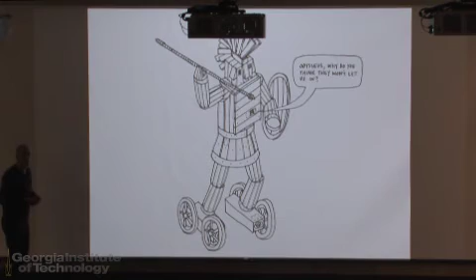Now, if I were to describe how, if you want a building to be an agent, that you are successful, I would say do not follow the standard modus operandi of our profession, which is, in my opinion, to take your a priori ambitions and roll them up to the gates of Troy — effectively rolling up a 60-foot Spartan with a spear — and wonder why... by the way, I swear a lot, because it's just about to come out of my mouth. I apologize in advance. Why the hell won't they let me in? Well, it's because you're rolling a 60-foot Spartan with a spear up to the gates of Troy. No wonder they won't let you in.

So what you must do — now this idea works if you are benevolent towards your client, it also works if you are malevolent towards your client, and I'll talk about that in just one second. But effectively, what you should do — now I personally believe that we are benevolent with our client. We like to identify what the agency is with them. So we work with our client to figure out what the hell will get us to the gates of Troy, i.e. what is the thing that will let us in? And once we get the thing in, that allows us to deliver what it is we want the thing to do. Now, you can be benevolent and deliver maidens, or you can be malevolent and deliver whatever your own agenda is. That's not really my issue. That is also between you and your therapist.

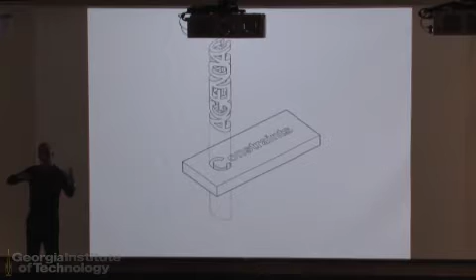Now, if I could summarize it into one single diagram, it would be this: if, in my opinion, we as a profession are very good at what we do, we should work with our client to figure out what we want the thing to do — its agency. We should understand the project's constraints, and they can be anything — political, social, economic, schedule related. It doesn't matter. It can be about what's at the forefront of technology, what's challenging the typology, the profession. I really don't care. Whatever those constraints are, understand that they are also malleable to a degree. And then you look, using critical naivete, which I think is the core of this, for the one iteration — or at least the one you think is the most beautiful — that will pass seamlessly through the constraints, not smack up against them so that what comes out is some bastardized version of it.

Now, the process that we go through to do that is banal. Okay, it's dumb. For us, the word dumb is not a pejorative term. If something is dumb, we feel like we're onto something. Our process is dumb.

We literally go through the same process in every project. We define what we think the core issues are. In competition, we act as a proxy client. When we have a client, we sit there and force them to discuss what is troubling them. We act sort of like an architectural therapist.

Now the next step is the most crucial step, and that is we take joint positions with them. The reason it's so important, remember, this is all prior to doing architecture. The reason we take joint positions with them in the abstraction of architecture is that when we come up to a moment of crisis, when we put something onto the table and the client says, wait, I don't like it, and you say, well, that does what we agreed it should do.

That is a moment in which you as an architect are empowered to say, hey, we get to go all the way back to the beginning, you have to pay me for additional services because I've done what you asked me to do. But it also reveals that, in fact, maybe the client doesn't actually want what they originally thought they wanted, and they've learned that along the way.

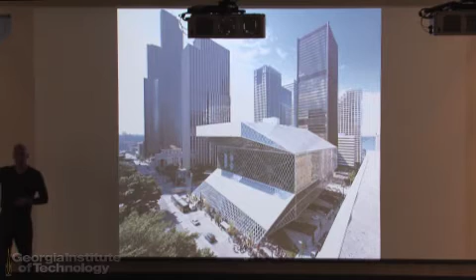The first project I'm going to start with is the Seattle Central Library, because it's the genesis of this process, largely having to do with my own experiences. When I started as partner in charge of this project, I was only 29, running an office in New York, while my mentor and senior partner was mostly in Rotterdam or flying around the world, not always present. So I couldn't walk into a room as a 29-year-old with an incredibly astute board and say, this is my vision. They would simply laugh at me and say, kid, get the hell out of here.

So the only way we realized, as an office sitting alone in New York, that we could get these people to do what we wanted was through argumentation. That's why originally I said we don't talk about beauty in public. Because if I'd said it's my vision, or I think it's beautiful, and they disagreed, we would have been screwed. So we developed this process.

So with that, I'm going to start the argumentation of the Seattle Library. In each of these projects I'll go through: what are the core issues, what were the positions, and then what was the architectural manifestation. With the Seattle Library, there were actually two really big issues, and we took two big positions, though there are a lot of other nuanced ones.

But the two big ones I want to focus on, the first had to do with the moment in time: 1999, prior to the explosion of the tech bubble. So there was incredible optimism about technology, and a lot of those prophecies have actually come true, with technology becoming ubiquitous, in your hand or your glasses and so forth. Seattle at that moment was incredibly wealthy, and there was a huge mandate for this building.

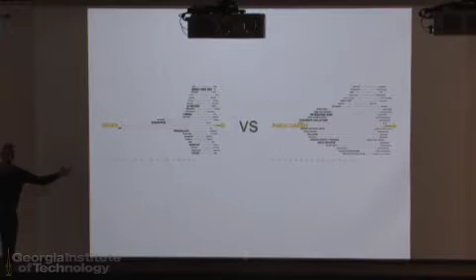So the first issue was that at that time we were seeing a simultaneous explosion of responsibilities and of information. What's interesting is that in 1999, that wasn't really apparent the way it is now. Libraries weren't readily saying that both of those things were part of their mission. They were saying, information explosion, that's our mandate. Social responsibility, yeah, it comes along for the ride, but it's not really what we're supposed to be doing.

What's interesting is that at the same time, when we visited contemporary libraries, owners and architects were relying on what I'll call universal flexibility, one space you could do anything in. But if you actually have two responsibilities, both expanding, both hungry, but you only really recognize one, that one will eat the other alive. And that's what we were seeing: buildings whose information explosion was the squeaky wheel, and whose social responsibility was getting squished out of the building.

So our architectural position, which really was the foundation of the entire formation of the building, was what we called compartmentalized flexibility. Take the things whose evolutions we could predict, at least the spectrum of which we could predict, and put them inside boxes, solving only that one thing in that box with its own tailored flexibility, its own mechanical systems, its own detailing, its own structure, its own circulation. And on the rooftops, place the things whose evolutions we couldn't predict but still wanted specific architectural character. That was the core of the idea.

We presented that to the library, and they said, you know what, we don't buy that as a position. We don't buy it because, just like everybody else at that time, they said information explosion is our responsibility, but the social responsibility explosion is not. What was interesting at that moment is that we had actually already been given their program.

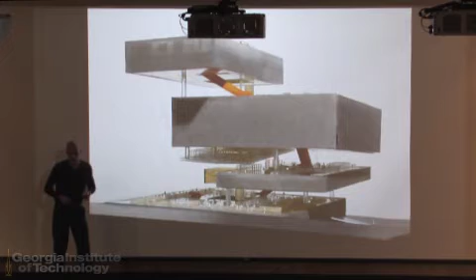Again, we went away. 3 weeks later, we came back with the design. And the design was literally that diagram, right? So there's 1, 2, 3, 4, 5 boxes, and then 1 down here, 2, 3, 4 in between spaces. We presented it to them. It was a very robust concept, but yet we didn't really know what the architecture would be inside of any of those boxes. And then something which Mark touched on, which I won't go into, we skinned it with a hybrid of a lateral system combining the facade system, and that was the result.

Now, when we first pulled the thing out of the box, the library board again said, go away. We went away. 3 weeks later, they said, come back. We came back, and they said, I don't know what that is. And you could see they were so pained. And he said, but it's everything that we agreed to do. So if you can do it for the budget, do it. And you could see they were so upset.

And then when we pulled it out of the box to the public, the same thing happened. The public went, this isn't what we need. We're spending $111.9 million for libraries. We don't need the architect's ego, we need a library. Now, we didn't defend it. The library staff defended it. The library board defended it. The city librarian defended it. The director of the central library defended it. And they said exactly the same thing: I don't know what that is, but it's absolutely every single decision we agreed to take together, and every time they changed it, it didn't work. So we told them to build it.

And that's a really hard thing for someone who's trying to create a critical op-ed piece to make any kind of story when a 65-year-old librarian says something like that. Conversation was over. All right, so there's the building.

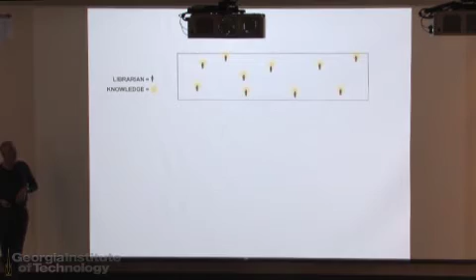And so we said we need to change the paradigm of the building. First, combine this idea of compartmentalized flexibility, but combine it with how to combat the situation where librarians are spread out through the building in fiefdoms. We want to figure out a way to put them in a collective so they can dogpile you.

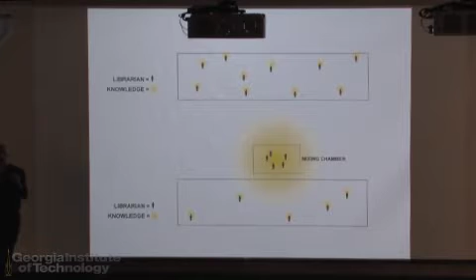So when you want to do research on Descartes, you can actually have someone who knows social philosophy, pure philosophy, and mathematics, all discussing with you to find out what it is you really want to study, whether it really is this avenue, or maybe that avenue, or maybe they turn you onto something totally different, and you start doing research on Hegel. But that's their purpose.

In order to do that, we had to overcome the other trail of tears I'll talk about tonight, which is the infernal situation when you walk into most libraries where you type in what you're looking for, you get a Dewey Decimal number, you relate it to some category like humanities, literature, and fiction. To this day, I do not know what the difference is between humanities, literature, and fiction. Dostoevsky, it's fiction, it's clearly literature, it's definitely humanities.

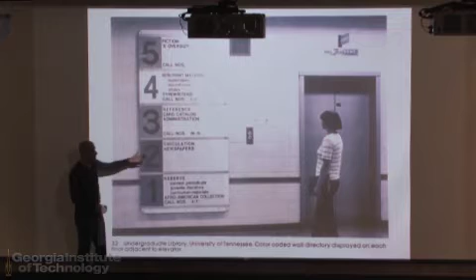Why isn't it in all of them, or one of them? I don't understand. So you take it from the Dewey Decimal number, put it into some classification that means nothing to you, then look onto a board at the floor it has to go to, get into an elevator, push the button, come out, and do the same thing in reverse. That's why librarians are used as docents. If instead we could create a system so clear to navigate by the patron that you don't need librarians for it, now the librarians can be pulled out of the books.

And so we created the book spiral. Simple idea: you go 000 to 999, running the Dewey Decimal System linearly. As anything within the Dewey Decimal System explodes or contracts, it just does it organically, and the thing grows. As long as you allow that system to double, and in our case that was the charge, allow the building to go from 750,000 books to 1.5 million books, it will always be in order, simply by reshelving as people check out books and reshelve.

In Seattle, though, that would have taken about 5 linear blocks, and so we wrapped it up into a 5-story spiral.

Also known, after the project manager said, oh you can't do that, that's going to be incredibly expensive—it's also known as a parking garage. That project manager had just finished one right down the street for a very low budget, and we said, dude, critical naivete.

Books don't explode, and believe it or not they don't really burn like cars do. So if you could do it down there for a low cost in a developer building, why can't we do it in this building also for a low cost? That's a core part of this idea of critical naivete.

So there's the solution. In this building, you get your call number and forget about everything else. You get into the elevator—it doesn't have floor numbers, it's got call numbers. You push the call number, you come out on the floor, call numbers on the floor, and you just walk to the call number, that's it. That allowed us to create the mixing chamber, this interdisciplinary zone in which the librarians could dogpile you.

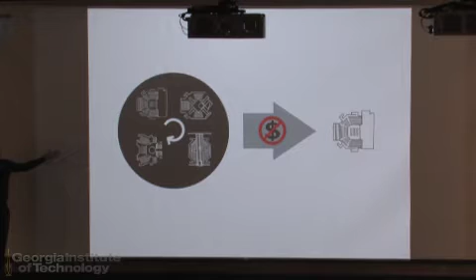So what happened is they started to run out of money, and eventually they had to fix their multi-form theater into a single configuration.

So the second position we took is let's reapportion the money. Let's not ask for more, but let's take the money from capital A architecture and put it into infrastructure such that they don't require operational budgets to go amongst various configurations. So those are the two positions.

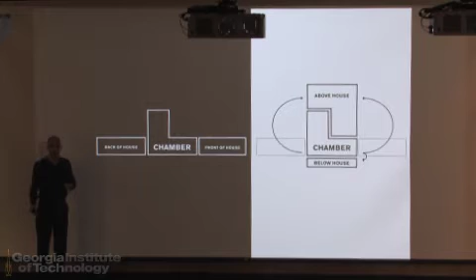The manifestation was dumb: take the front of house and make it below house, take the back of house and make it above house. Truly dumb. Makes no sense at first. The reason was it allowed us to create what we like to call affectionately superfly.

Really? I got nothing. Okay, well I guess there isn't anybody my age or older in the audience, except for Mark.

The idea of superfly is that you could take the fly tower, all the flexibilities associated with it, and smear it out over the auditorium. And then all the pristine elements you could pick up and move into the fly tower or the extended fly. That would remain an environment you could nail, drill, cut, glue, paint, and replace at minimum cost.

And then the third result was something we didn't actually anticipate at first. It wasn't one of the positions, but it became one — it simply opened up the perimeter of the chamber such that the artistic director could now control suspension of disbelief, deciding when Dallas appeared or disappeared from the audience's collective consciousness.

So there you see the building, that's it before it opened, in a thrust configuration. These are the four configurations we agreed with the client we had to do with two stagehands and a push of a button in about 15 minutes. The agreement was that these configurations had to have exceptional sight lines, exceptional acoustics, and exceptional intimacy.

This also became a theme in our work ever since — the idea of divide and conquer, which I already discussed with the library. If you provide very specific things, you actually get a lot of flexibility. What we learned is that if you give a bunch of very specific presets along a spectrum, as opposed to a black box where you could theoretically do anything but don't have the money to do anything, so you actually do nothing...

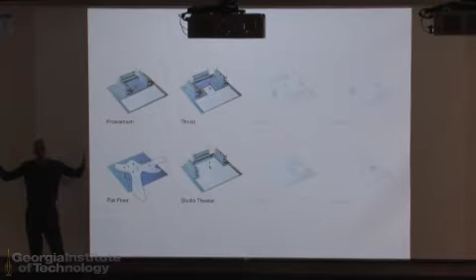If you give them these presets, and each one can be moved off center, weirdly, if you kind of squint, you start to realize you have an enormous amount of flexibility. So we wanted to be able to do all of those, but we also tested how easy it was to push all of these off center to create some of the other configurations.

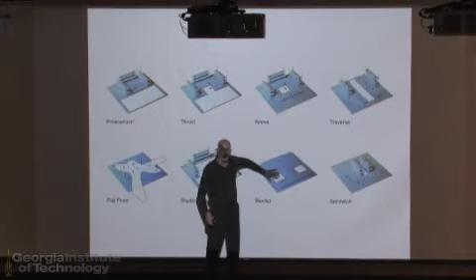So we also added arena and traverse. Now these weren't things we talked to the client about — we only talked about those others. But we did arena, traverse, and then we made up bipolar and sandwich. That one was mine, just to see how flexible this thing is — in virtue of giving them presets, does it actually increase the flexibility?

There you see it again before it was open, but someone was just giving a lecture in the building in thrust configuration. This was Henry IV, the very first show. This was something the theater consultant and we designed together — basically to see how crazy we could make the auditorium. We succeeded, and it was totally infernal — no one knew where everything was coming from.

And then there was the flat floor configuration. This one was an interesting debate between us and the client. It cost an extra $500,000 — not an extra as in we asked them to increase the budget, but an extra from the architectural side to do. And what was strange is that we, the architects, were arguing to do this.

And they really resisted us — why do you need to do flat floor? It's not a theater configuration we think is going to be used very often. Ironically, they do now use it a lot. But that wasn't why we were arguing for it. We were arguing for it because while they were building this building, they were also building, right across the street, the Winspear Opera House. The Winspear Opera House is 2,300 seats.

The Dallas Theater Center survives, historically, by getting road shows from Broadway. Well, where do you think those road shows are going to go once they build a 2,300-seat opera house right next door? They're all going to go to the opera house. So weirdly, this institution, the AT&T Performing Arts Center, was building one institution that was cannibalizing the revenue source of the other, which was the one that already had a revenue stream.

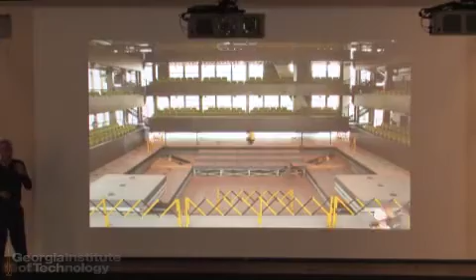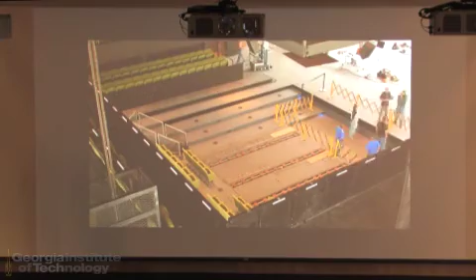I'll go back to what I said previously: the unique moment in this project was when we, the architects, started to argue for reapportioning the budgets for infrastructure. I think it was only because it was coming from us that, in fact—Mark will attest—there was a moment where we did a Hail Mary and the client didn't know it. We said we can still do capital A architecture with that budget. What we did is we held basically cheap aluminum siding in the budget for the exterior, knowing damn well we had no idea how to do something extraordinary with that budget, but we had confidence we would be able to do so. I think it probably wouldn't have happened if it hadn't been for Mark.

Okay, I'm going to go on. Then the other repercussions—something not originally planned for, but maybe became the most important and defining thing about the building—this notion that the entire perimeter can open up.

So there you see the enclosure. That enclosure is an STC 57 glass wall—basically a box-in-a-box construction. What you're seeing inboard is not a theater curtain, it's actually a trompe-l'oeil: vinyl curtains integrated just on the inboard of that acoustic wall. That enclosure can therefore be totally blackened out. You can do totally hermetic normal theater, but you can also open the entire perimeter up.

So now, at the last act of Macbeth, as the artistic director, if he or she wants you to associate the parable you're seeing on stage—or to be or not to be—right at that moment, suddenly you see daylight, or darkness, or cars driving by. Interestingly enough, you don't hear the cars driving by. So it allows you to still have the hermetic environment, but to let reality in—it's no longer the hand of the architect that determines the suspension of disbelief.

What's interesting about this idea is that it also started to build patronage. People would come—Dallas doesn't have a great climate, so the hit months where it happens aren't very great—but families will come and sit on the grass outside, watch them block out sets and rehearse, building up their patronage. Now their patronage has increased threefold.

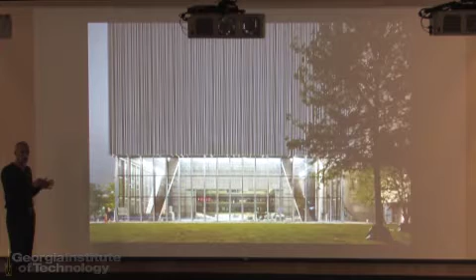Another statistic, talking about flexibility: of the 25 shows or productions they've run in the building since 2009, they've done it in 20 different configurations. There are 4 presets, meaning they've done 16 shows in something that doesn't look anything like the presets we gave them. And another factoid that proves the concept—over the first 50 years of their existence, they sent 12 different productions out of house, but all to small regional theaters. In the last 5 years, they've sent 7 to Broadway or off-Broadway.

To take this idea of the perimeter opening a step further, we then also made the perimeter open. So when they do a Streetcar Named Desire, they can literally drive a motorcycle directly in, and have the audience come directly out of the building.

So in the end, this is what we gave them, a kind of palette. They have multi-form, but they also have multi-procession. You can call it episodic, processional, focal, and open, but effectively it is Renaissance, Wagnerian, Greek, and contemporary.

So the ideal is: okay, they can use our auditorium, and in our auditorium you go down into the building, into a lobby with little dangly lights—you might like them, you might not. You go up our stair, up into your seat. But the artistic director can literally say, I want someone to come in a Wagnerian sequence directly into the chamber.

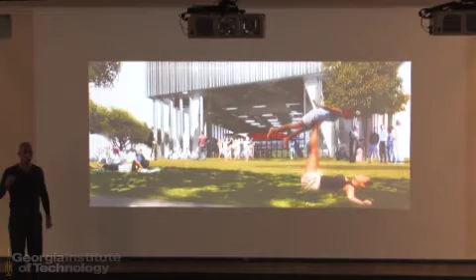So now they could do this: you could enter Wagnerian, first act in thrust, intermission in Greek, second act in arena, and everyone leaves through our lobby with dangly bits. That, I would call, is architecture doing something—our hand as architects empowering the user, without, I hope, creating something you'd claim is shitty architecture.

Now, how we get to this—I'd say our process is Darwinian. It's this kind of incredibly logical process. But at every moment in this decision tree there are moments where two or three or four different ideas all work, and this happens four times a day. At every one of those moments, there's a subjective aesthetic decision being made.

So it is not form following function. It is a totally blended process. But it is still highly Darwinian, highly argument-based. And there you see the conclusion.

Now the next project I'm going to show—first I have to, it's actually two projects. I have to start with a sad story and end with a happy story. The issue and position and manifestation of this entire thing is just about speed.

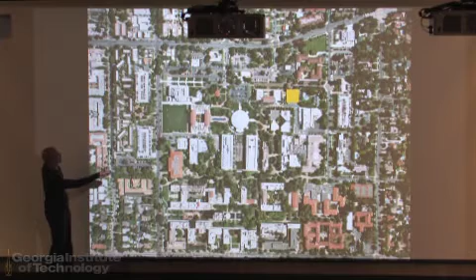It starts with a project we started in 2006, an interdisciplinary building for Caltech. Caltech is this square, like this. It's beautiful—takes 15 minutes to walk from there to there. It's always 72 degrees. They are the richest institution in the United States by a magnitude of 10—the next closest institution gets one-tenth the funding per student, federal funding per student, and that's Stanford. So they're rich, they're warm, they're in beauty, there are no problems.

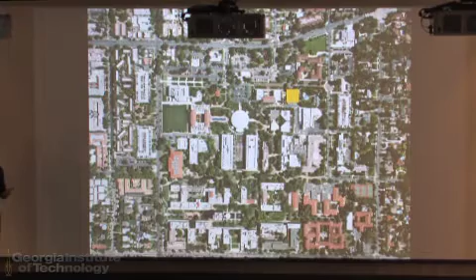We didn't know what to do. There was no hook. In fact, the only thing we came up with originally, honest to God, was: it's a center, but it's not in the center of the campus. That was it. That's all we could dig up.

Eventually, we created this. It was an interdisciplinary building where they'd take people who had won the Nobel Prize in applied and computational mathematics, chemistry, particle physics, and so forth, and just dump them all into one building and say, have at it—let's see what happens.

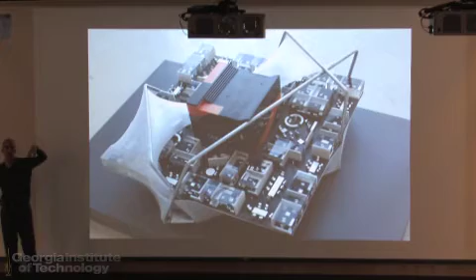So the concept was a big flat plate on which all these Nobel Prize winners would sit with their entourages of postdocs, doctoral students, graduate students, and undergraduates, and they would grab or give up space on that plate based on a set of rules. We designed that plate to facilitate that, then took all the recitation and debate areas and made this tower in the center. We wrapped it in a kind of cocoon, so it looked like a big caterpillar thingy. You can see the weirdness of the spaces.

We got all the way through concept design. The university loved it, they approved it. We were supposed to start schematic design and said—wait, it has to be approved by the Pasadena Design Commission. You didn't think that was something we might have needed to know at the beginning of the process?

This, of course, is an interesting moment in contracts where you're not really sure who's on the hook for this. You did your job, it was approved, you met the positions you all took, now you're going to go before the design commission. You don't really know what's going to happen, and we should have known based on what we saw here. The design commission looked at it for a second and said, no, it's got to be Spanish style.

So I think I'm really smart. I go to the president of Caltech, who is also a Nobel Prize winner, and I say to him, this would be kind of cool. I don't know anything about Spanish style, but a lot of people in Pasadena do. Why don't you hire someone to do a Spanish style box, and we'll put it around a really crazy kind of ugly wild thing, and it will do exactly what you wanted, which is to have this really gregarious thing, but it'll be even more gregarious and weird because it's in a Spanish style box.

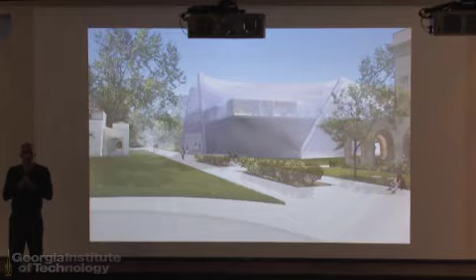Now the president of Caltech looked at me and said, you know, Josh, you've been telling me for about 5 months now that constraints are the mother of opportunity. Isn't this just another constraint? I.e., don't try to outsmart really smart people. You totally called my bluff.

So now I'm in a total panic, because I really don't know what to do. We're going to have to redesign. It's too early in the process to ask them to pay us, because that will piss them off and we'll lose the project. So we're starting to redesign at our own cost, and fundamentally from square one, because we're trying to think, how on earth are we going to do Spanish style?

And we thought about this for about 3 weeks. Everything in our world is in 3 weeks. And then we realized we were doing the wrong thing. We were focused on the wrong issue. The issue was not the design.

Now, what does Neo say to the kid? He says, how do you bend the spoon? And what does the kid say back? There is no spoon. Thank you. You know how many times in universities I've given this image and no one knows the answer? I even did it at SCI-Arc, like next to Hollywood. No idea what I was talking about.

There is no spoon, right? The problem was not the design. The problem was the design commission. We had to redesign the design commission. So we asked the head of communications of the university to put us on the docket on the first day that the design commission was going to review 85, basically, garage additions. Now, you have to understand that Pasadena is full of mid-century modernist buildings, and all of those beautiful mid-century modernist buildings, for some reason, now need to have Spanish-style garage additions.

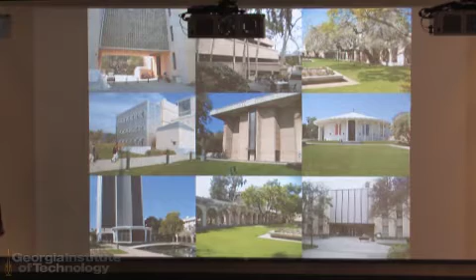So we go in with 2 slides. And the first slide was this one. And we said to the Design Commission, over the last 82 years on which you have been legislating what can happen on the campus, you have indeed done Spanish style and Spanish style. You've also done modernist and brutalist and neo-modernist, and you've done bad. And the only thing, if you squint, that you seem to have legislated over 82 years is the color beige. And our building is beige, so you better let us do it.

Now, you would think there would have been total silence, but there wasn't. There was a huge shitstorm that erupted, not from the design commission, but from the people behind us who were waiting to do their garage additions. They went, yeah, you're right, why do I have to do a Spanish-style garage? So we then just took our 2 slides and walked off the stage.

3 weeks later, we got - I already gave the punchline away - we got a letter from the Design Commission. The Design Commission basically said, go away, as long as you do a building that is 3 stories, austere, with a ground floor arcade, do not come back. Okay? And so we took the old idea and we did what we call the wolf in sheep's clothing building. We just inverted it, like a sea slug that walks up to something and wants to eat it and just literally inverts itself to eat the thing. We just did that to the building.

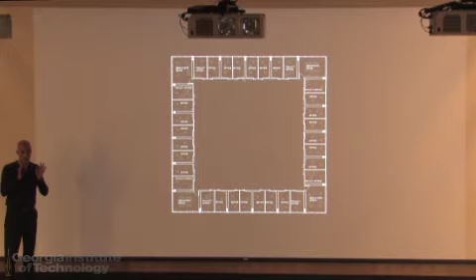We took the thing that used to be really austere and kind of rectilinear and uptight in the center, and we put it around the perimeter. And that's where we put all of the Nobel candidates into little entourages. We basically built the world's most hyper motel. It was a post-tension concrete slab building built up on little pilotis. It had no detailing. It was concrete floor, concrete ceiling, so low that we didn't have to have breaks in the stairs.

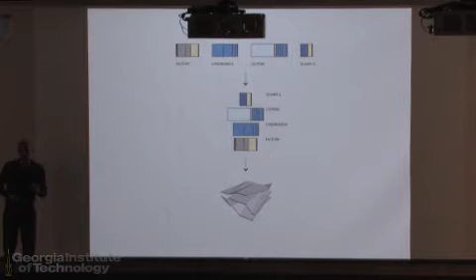And the way we did that is we didn't have mechanical systems. We just put fan coil units in the wall, just like a cheap motel. And that cheap motel would blow over in a wind. So into the center, we had to put a more gregarious structure, a steel structure, and that steel structure had all the recitation areas.

So it was the gregarious thing that they wanted to be interdisciplinary and mixing in the center. And its slopes and so forth were all very carefully designed to create bent plates.

Why? Go back to your structures class. When you take something and you fold it, what do you end up doing to it? You increase its moment of inertia. When you increase its moment of inertia, you increase its stiffness.

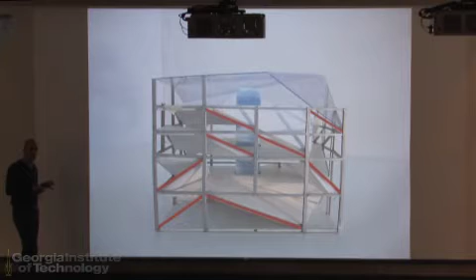So if we could come up with a system in which we had 2 diagonals per face, per floor, per face, we would create an idealized braced frame. Now that's what we presented to them. We're now 6 months in, we've been working for 3 months at our own cost. We present this, and by the way, there was still this little thing on the roof that we wanted before.

And we presented to them, they said, that's great, we really like it, but couldn't this move over here? And couldn't it move? And we said, no, it'll fall down. I said, come on, that can't be true. They said, no, it'll fall down. So they took the building over to the physics department. The physics department looked at it, and said, it'll fall down.

And so it was a moment in which we truly handcuffed the client, simply because we didn't want to keep redesigning at our own cost. We'd had enough. And there you see the building, a representation of the interior. They built it just as I would say - first the steel braced frame, and then they would build the post-tension concrete lightweight structure around the exterior. And it is 3 stories, austere, with a ground floor arcade, and these are by code roof appurtenances.

That was great. We were 2 weeks away from starting construction. Morphosis's astrophysics building had just started, there were 3 buildings behind us that were also in the works. And then the president suddenly stepped down with no real explanation, and a very curmudgeonly Frenchman stepped in, who wasn't really into contemporary architecture and was certainly not into continuing the legacy of his predecessor.

And we got shit-canned on the spot. Just, we got a letter that said, here, that's it. Don't ever call us again. Here's your models. Basta. Goodbye. And this was literally 2 weeks before we were supposed to start construction. We put it away. That was 2008, and that was it.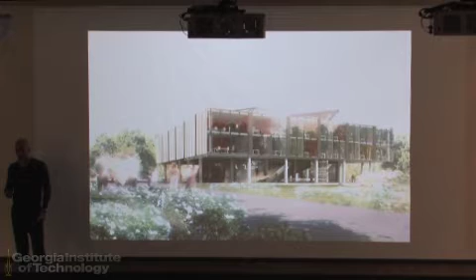That was it until 2009. 2009, this man, he's about this tall, walked into our office with Giselle Bundchen. And I looked at Giselle Bundchen. And he's talking, and I'm looking at Giselle Bundchen. And he says...

They were going to demolish this headquarters and factory with eminent domain to build a freeway off it. And because they were 50% publicly owned, they were worried that if that happened, their stock prices would crash. And this was at the worst of the market, right? It's 2009. He thought, we may go under, simply because of the negative publicity of losing our headquarters.

So what he starts to say, and I'm not really paying attention, is he says, I need someone to design and build a world-class building in 11 months. And I'm still looking at Giselle, but that caught my ear, and I thought, this guy is nuts.

He's truly nuts. And he said, no, but don't worry about it, because my cousin, who's the CFO, he just bought a structure that has been sitting fallow in the hills of Istanbul for 25 years. So we'll just use that. It'll be a lot faster and a lot quicker. And I'm thinking, this guy's on hashish. That is not going to be faster or quicker. It's going to be slower and infinitely more expensive.

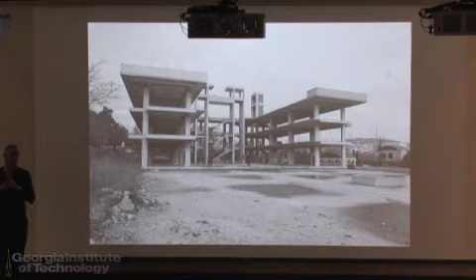So I showed him Caltech. I said, do you like it? He said yeah. I said, do you like it a lot? I said, okay, let's go to dinner and you bring Giselle and we'll talk about terms. So that was on Friday.

On Sunday, we flew to Istanbul. On Monday, we met with his structural engineer.

I will say that these things exist all over the countryside in Istanbul. Why? Because development is cheap there. Labor and materials are still cheap, land is cheap, and so speculation is cheap. People start to build things, and if it doesn't seem like it's going to pan out, they just walk away from it. So this thing was just sitting on a really prominent spot on the Asian side of the Bosphorus.

We got to Istanbul on Monday. We met with his structural engineer. That is the structure as given. And literally, because it was also meant to be a motel, it was exactly the same floor height, basically the same perimeter and shape as Caltech.

So all we had to do for that day is figure out how to take that and morph it into that structurally. On Wednesday, they started construction with construction documents of the perimeter. Okay, now we are one day in. He said 11 months.

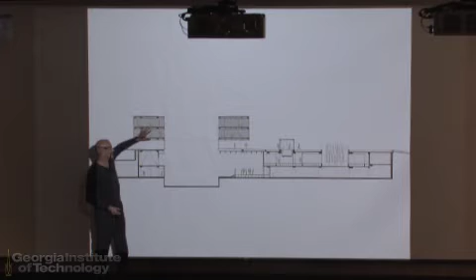But the problem was inverted. We had this thing—I'm already showing you the refinement of the structure, but effectively it was this really, really heavy concrete structure, because they don't really worry so much about the structural engineering there. They just throw tons of rebar and concrete at it. They have really bad earthquakes, so they just kind of over-design it.

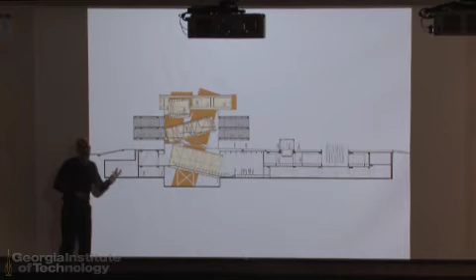They don't really care. So it's this incredibly heavy concrete building into which we had to very quickly design the other stuff, because we couldn't take Caltech's guts—we had to take the guts that would apply here. That thing had to be a lightweight steel structure because of speed, and because we didn't know how the concrete exterior would perform, we had to keep them disengaged. So it was the exact inverse problem of Caltech: heavy steel structure holding up a lightweight concrete structure there, versus heavy concrete structure not engaging at all a lightweight steel structure here.

We took a page out of the Seattle Library and put all the program into boxes, but these were very special boxes—boxes that structurally could be put onto each other in any possible way and welded together and the thing would stand up. They're kind of like massive Lego.

That took us about two weeks. We needed to stay on schedule. We needed to have the steel back after two months. We were one day in when we started construction, and two weeks in by the time we had finished this and sent the mill order off to the steel mill. Then they had six weeks to make the steel.

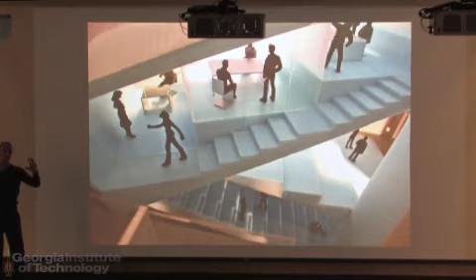In that time, we were figuring out how to take these boxes, to slope them, to put them in appropriate adjacencies to the rest of the program, sloping them so they become the primary circulation, as you see here. We went through all these iterations trying to solve the problem. After six weeks, when the steel showed up, we said, it's that one—build that one. And they did.

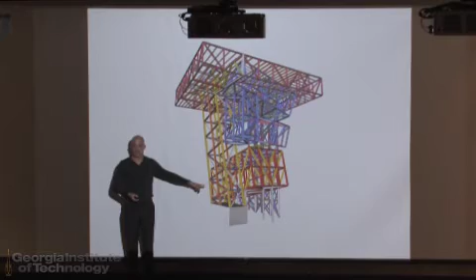To our complete shock, at one point we realized one of the boxes wasn't where it was supposed to be. We said, what are you doing? It turned out they had taken our model of this thing and were building it off the model, not off the drawings. Why? Because that thing could go any way it wanted to, and they built it—so that's the thing we designed, and they built it as I just described.

They rented the property next door, built the box in its entirety, picked it up in the air, craned it over, and dropped it into the center. So here you see the ring—now it has become a perfect square, and sort of erupting out of the belly of Kane is the alien. It's another great Hollywood reference.

And there you see the 5th box being craned in. That's the 6th box, that's the 7th box, and that's the 8th box.

They did the entire steel erection in 1.5 weeks. So we are now 2 months, 1.5 weeks into the project. Full disclosure, we missed it by 2 months. It ended up being 13 months, not 11 months. But this is the result.

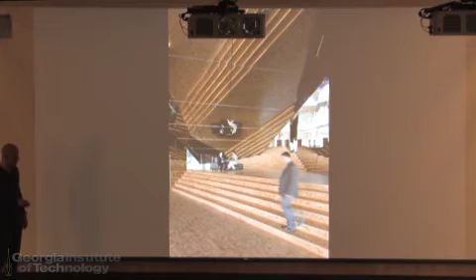This is the basement area. There used to be a parking garage. That's the library. This was a museum dedicated to his father, showing all the various designs they had done. The auditorium went from the basement up to level 1. We used the rooftop of the auditorium to go from level 1 up to level 2. The next box is the buyer's area.

They create clothes, but they also create really remarkable textiles. So people will come and order textiles, and this is the buying area for the textiles. They go up to level 2, then use the meeting box, with all the meeting rooms, to get up to level 3. Level 3 is the headquarters, and there you see Cem after 13 months.

As I said, the entire issue was how do we do this in 11 months, which we failed to do. The entire position was: do everything in 11 months, that was it. One of the interesting things for us is that after being obsessed about resolving every option and making sure we're doing the right thing, here we didn't have time to do that. We had to move quickly. We also realized that gave us a lot of leverage on the client.

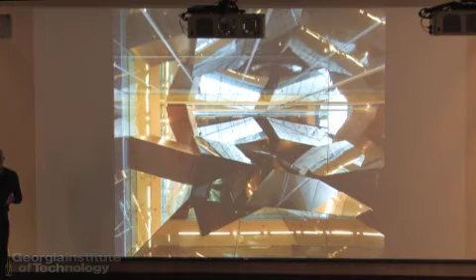At one point we said to Jem, we want to wrap the entire thing in one-way mirror glass. These are actually totally unadulterated photographs of what we call the show box. Jem, of course, was like... and we said, Jem. So Jem built it, also in a kind of pained way.

We wanted to do it, to be honest, and we never told them this, but since it was a kind of chauvinistic, voyeuristic enterprise of fashion, we thought, okay, if we're going to do it, let's do it in spades, and have Giselle Bundchen replicated 1,000 times across the building through all the mirrors. So you could say that's what we designed.

Then there was the issue of the thing around it, the thing that we were given. Now, we knew we couldn't do anything sexy with it. I hope the right image comes up. No, actually, I know it's going to come up in a second.

Jem kept saying, I want to put the name of my company, Vakko, on the building. And I'm like, it's not really us, Jem, don't really do that. And he really wanted... no, that's not the image I thought it was going to be. He kept talking about Louis Vuitton, kept talking about Coach.

I said, Jem, instead you have this really, really robust building that you can't make go away, and you want to emphasize sustainability. You're the first company in Turkey that is focused on sustainability. It would be more sustainable, or more beneficial as a sign of sustainability, to reveal that you're doing an adaptive reuse building, rather than try to hide it.

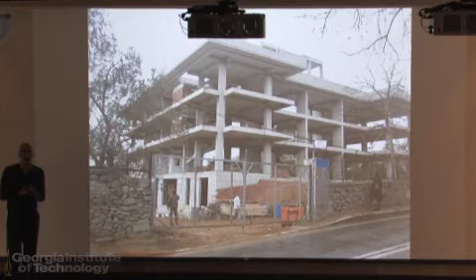Because first of all, we're never going to do it. They're always going to think, if we hid it, that we're going to look bad, and they'll think you commissioned a shitty building. So if we could reveal the guts, you can use it as part of the branding of the building. To do that, we had to create what we like to call saran wrap: you make the glass so thin that it reveals the contents, reveals the thing that we're building all this around.

Now, it goes back to structures again. If you have plate glass, it's going to be quite thick. If you put mullions around it, the glass gets thinner. But if you can slump the ideal structural shape into the glass, i.e. increase its moment, increase its stiffness, that can make the glass super thin.

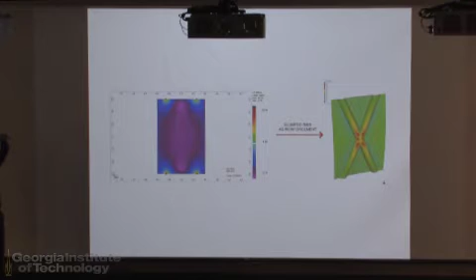And why would it be an X? Because we didn't know how this thing would react in an earthquake, and we didn't have time to do a forensic analysis. So the most expeditious way of putting it on the building was 2 pins at the top, classic curtain wall hanging, and 2 pins at the bottom just to make sure it doesn't fall off the building, and that makes an X.

Working in Turkey was the sweet spot of their building history. They were going through their industrial revolution, and because of that, they had a confluence of high technology, because Turkish developers had gone into Europe—there's a huge Turkish diaspora—become very powerful, gotten all the high tech, and then come back into Turkey to start building again, where they still had a really strong craftsman class.

So we could do things there that you simply couldn't afford to do anywhere else. They were making jigs that were very, very precise because they had the craftsmen to do it, and the labor was cheap. Each one of these jigs would get destroyed after 2 or 3 pieces of glass, and they had something like 156 of them, so they could afford to do that.

There you see the glass put onto a jig, then going into a very high-tech kiln that was selectively heating and cooling the glass. It would sort of slump into the idealized shape—you see the slump—and it was making super, super thin saran wrap, basically. And there you see it in situ on the building.

There's Giselle, for me I guess. And there's pictures of the result, both on the exterior and interior.

So we went from that to that. Now we are already way in.

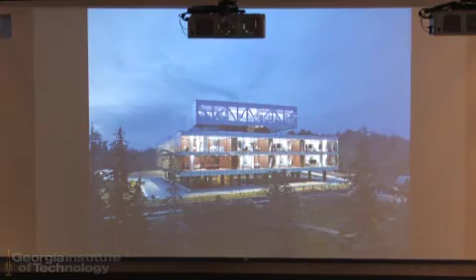I was going to talk about a bunch of different projects. I'm probably going to just try and advance over the next one, and then only talk about new work. Is that okay? You mind if—unless it crashes the computer. Okay. Oh, and you need to just tell me when to stop.

Okay, so now I'm going to talk about new work. And...

Effectively, you're going to see two things. First, I can't make the same arguments because we're not done—we haven't gone through the process and been able to make the really clean retroactive argument. And I make it sound as though that's a negative. For us, it's actually really important.

We believe in argumentation. It's not something that we simply turn on for the client to get the client—it's really what we believe, and we do it because we realize it's a way to get clients and to do things and get really crazy things built. It's not Alejandro Zaera-Polo's argument that there are two different processes, one for the face of the client and one for the office. We literally, just because that's what turns us on—because we like buildings with agendas—simply have one process.

So the first project I'm going to show is something I'm not really supposed to show. It's the Future Center at Mercedes-Benz. This is a commission we started on a competition over two years ago. We officially won it about six months ago, and it is to add to this campus here. This is Untertürkheim—Mercedes-Benz headquarters and their original factory.

This is the UN Studio, Ben van Berkel museum, and it sits next to what they call the center. So the museum and the center is the largest dealership of Mercedes-Benz in the world. Currently on their Mercedes-Benz world, if you will, they have their past and their present. And they gave us the other side of the site to create its future.

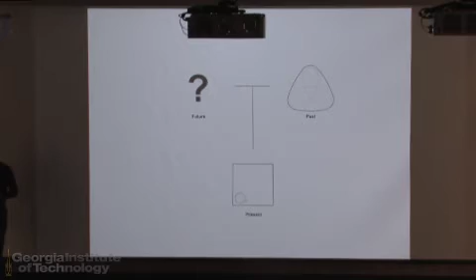The second position we took is that the museum is cloistered and protected. That's appropriate. But the future center has to be dynamic and exposed and actually a little bit dangerous. It has to be revealing that it's constantly being changed. This is something in which on a daily basis they are going to have to change the contents, or else it will not be the future center. And so reveal that change. Now that is a huge problem in Germany, which has the highest energy codes in the world, to do a glass building. We'll come back to that.

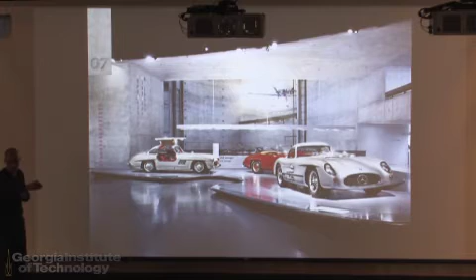And the third issue and position was, unlike a museum, a themed museum, which has a historical lineage, the only thing it has to do is figure out how to add the next thing. Well, in a future center, everything is up for grabs every day. And so learning from the project I just skipped over, so you won't know what I'm referencing, and learning also a little bit from the Wyly Theater, we said, you know what, instead of doing this, where it's a linear thing where you add one thing, let's give them a palette. And that palette can be curated at will, but a palette has specificity. It's not just a blank box.

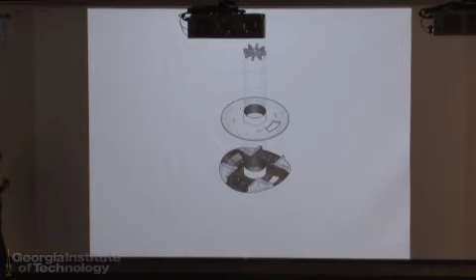And that palette had three different environments that we proposed. The first was a big horizontal environment that had panoramic views out over the entire campus. It is daylit or ceiling lit, so it has a soft glowing ceiling that's ideal for exhibiting automobiles and parts and things like that. It is floor loaded. It has the air handling from the floor, so it's just a completely flexible space.

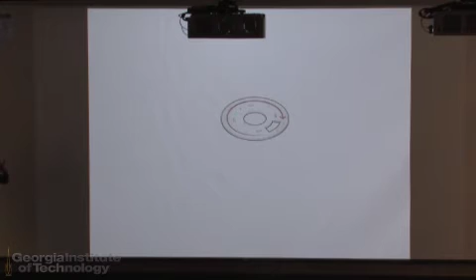And it has a linear circulation, and that linear circulation, while it's linear because it's round, doesn't prioritize anything. And so on this, we said, put the 'near future' - the things about 10 years out that you can present. And the reason you can present them is you've all stolen them from each other already. You all have exchanged the same designers and engineers and technicians, and so you all pretty much know what the catalytic converter of 2024 is going to be. So go ahead and put it on display.

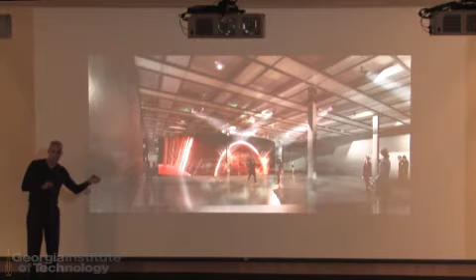But the second thing we provide is the counterpoint to that. It's a much lower environment, just so happens to be blacked out and cruciform shaped. And into this environment, we said put the far future. But you can't show your far future, so you can show two things. You can show your visions from the past of the future - what did Mercedes-Benz think the future was going to look like when they were in 1950, because that's not giving away anything. And they can give visions of represent current visions of the future. And so we basically designed this almost like a theater, where they would use mise-en-scène, art, cultural productions to be able to create environments that would be provocations.

And then the third thing was what I think actually won us the competition. So that environment was this cruciform with a major and minor axis, and its circulation was not scripted. It was actually a five-square grid where the curator could actually script any relationship of any part to any other part at will. But the part that I think actually won us the competition was the thing they were missing. And we added it to the brief. At first they were very uncomfortable with it, and yet it stayed and stayed and stayed through this lengthy competition process.

You need to actually have this building be a debate chamber. It has to be literally creating the future on the spot. You need to be able to have the World Economic Forum here. You need to have public debates about overpopulation, about water control, about horizontal expansion of cities. You need to make strategic alliances with MIT and with the ZKM in Karlsruhe. You need to engage the reality that you have to create content on a daily basis, and if you can't, maybe you're not the company that is at the most forefront of the future.

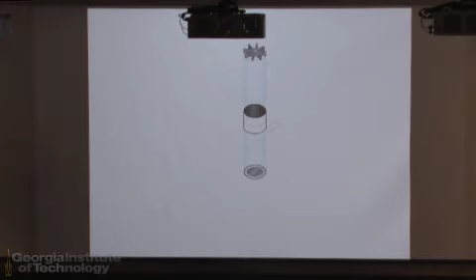So what we provided in the center of the building was a simple device, and it changes the relationship of all the other things while also being this debate chamber. It has three elements. Oh yeah, there you see it.

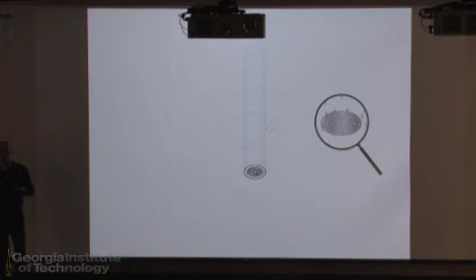It's sort of a contemplative environment. It has a roof that you can suspend anything from, both technology and heavy objects. It has two media screens. The media screens can lift up partially in order to curate different relationships of the two floors with each other. It can disappear, it can take any combination thereof. And then it has a theater floor that can be flat, it can take a mound, or it can recess. It can go into a debate chamber.

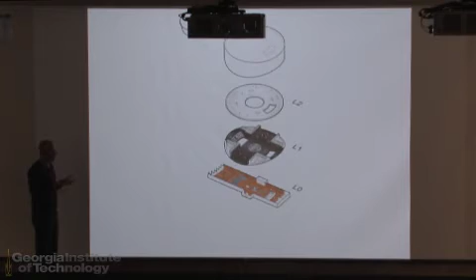That thing, therefore, is this catalyst that sits in the middle, and they are programming it on a daily basis, and it's constantly moving and taking different configurations. The building literally changes while you're in it. I'll now just take you through a movement through the building: lobby, there's this element I'll show you in a second, up to the near future, down to the far future, and back out. It's super, super, super dumb. Why is it dumb? Because the shit's changing constantly.

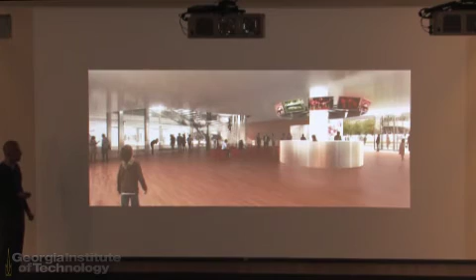So there you see the building from Mercedes-Strasse, where you see the contrast of the cloistered museum to the transparent future center. You enter the main campus, enter the lobby. The lobby, the first thing that you see is actually something called the future garage. There's a huge paternoster of prototypes. So there's this kind of constantly moving element that introduces you where you can enter the exhibitions, that takes you up to level 2.

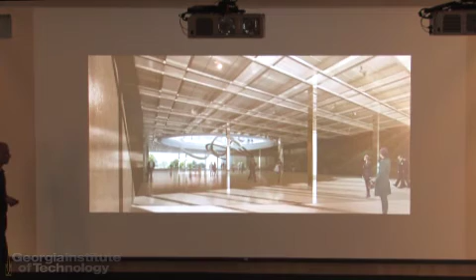This is the near future. And then you start to see the impact of these changing media screens and how they can start to curate different relationships of the near future to the far future to this provocation that's in the middle. There you see the far future, also the media screens changing. And last but not least, this is the future core, the element itself.

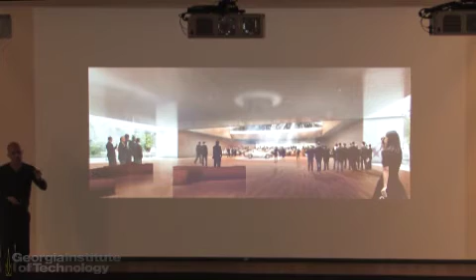And then also at the same time, let's just go over this because it's kind of almost immaterial, that the lobby then also has the ability to go from being a formal lobby to actually an enormous event space, so they can use it to have all of their unveiling of their new cars. So strangely enough, they will no longer do it in the center of the museum. They will unveil their new cars precisely in the environment where they're debating the future, in order to tie the notion of the brand being futuristic along with the current products that are currently now being perceived as being state-of-the-art.

Just to emphasize that further, the auditorium is also this highly flexible space. And so in the end, we're kind of doing this, right? It's kind of what I said about the Wyly Theater. We're giving them a palette. We don't know how they're going to use it. They don't know how they're going to use it. They can't know how they're going to use it.

This is totally washed out, so you can't see it. But go back to this idea of the transparent building. This is something we spent an enormous amount of time with Mark on. It is a classic double skin. I'll just show the image of it first. The notion of a double skin is that you have a sacrificial layer on the outside, you have an insulated layer on the inside, and you have a retractable curtain that sits in the interlayer.

During the summer, you deploy the curtain so the sun hits it, the cavity heats up, and then you can ventilate the cavity so heat doesn't get into the building. And then during the winter, the cavity heats up, and you take that heat and put it back into the building. And then when you don't have direct sun on any portion of the building, the curtain simply lifts.

So it's like the sun's stupid, it doesn't know that you're walking around holding your hand in front of its face. So you make a transparent building, and the only time you need to deploy the entire thing is when there's an overcast condition. When there's overcast condition, there's glare, so the entire thing will deploy. But on a sunny day, this curtain will simply deploy and retract, going around the building. So the building is changing not only in terms of that inner core, but also in the exterior of the building. You see it at night.

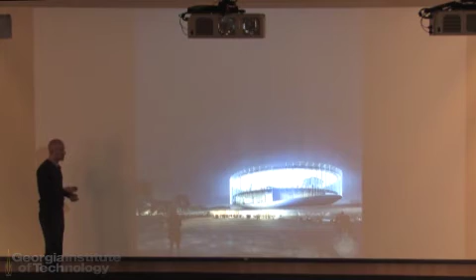Okay, now I'm going to hit like 3 projects really fast. What's been interesting about our work lately, I don't know where it's coming from, I almost should ask Mark if he has a theory. We're talking about buildings doing things, and we're starting to do a lot of things I never thought we would do, which is moving things. I used to always be really skeptical. When we did the Wyly Theater, I thought that would be the only time we ever do that. And all of a sudden now we're getting into projects in which moving is becoming important, and I don't know really what that means. But you'll start to see a theme to everything I'm about to describe.

Well, maybe one project, that's not true. This is a project in a city I'm not allowed to say, but you can figure out if you look at the image long enough. It has 2 interesting issues. One is it's on the equator, and the second is that it's in a Muslim country, and that drove the design. Why would it being in a Muslim country, when it's an 80-story financial tower, make any difference to the design?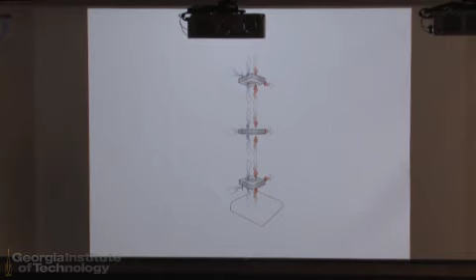Let's think about it. How do you get the occupants of an 80-story tower out of the building 5 times a day to pray? That's a lot of people. If you actually put in the number of elevators you'd need to do that, it would make a massive core, spreading all the remaining meat on the bone very inefficiently, and the building would be incredibly expensive. If you look at the Petronas Towers, which I'm not allowed to say because it happens to be in the same city, you'll see exactly that. It's a highly inefficient building, a massive core, with a little ring of offices around it.

The concept of the building was to take the same idea, the mechanical areas are here, and put prayer floors opposite those elements. So now everybody moves up or down from their office to a prayer floor during their call for prayer. In doing that, we keep the core very slender. But we also create an interesting condition I'll come back to in a second.

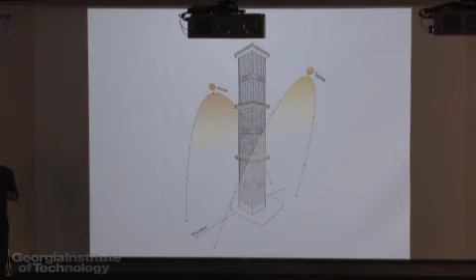Now, the second issue is that it's on the equator. When you're on the equator, the sun comes from where? Everywhere. Now, the funny thing is, when we first posted this on our website, we got comments from people saying, 'You stupid idiots, don't you know the sun comes from the south?' We're really northernists, if you could say that. So it comes from both sides. That means you can actually create an energy screen concept that is uniform, as opposed to what we have to do in the northern hemisphere, where every face should theoretically be different.

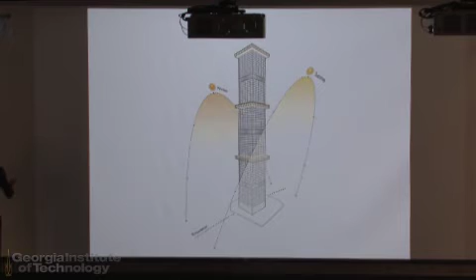On the equator, they can all be exactly the same. And so we created a veil, which was a horrible metaphor for reasons you might be able to guess. That veil was silver on the outside and black on the inside. It was silver to reflect heat and black so that you could see through it. That's something that 3M basically proved in the 90s, and then Microshade has run with it.

This idea that your eye, even with something that's about 96% opaque, your brain will see the 4% and fill in the dots and basically think it's transparent. So you can create something highly opaque, as long as it's black on the inside and the apertures are the right dimension in relation to each other, and your brain will fill in the dots. So if you combine that idea of a veil with a building that is a pure profit machine but has larger prayer floors, we can actually do this with it.

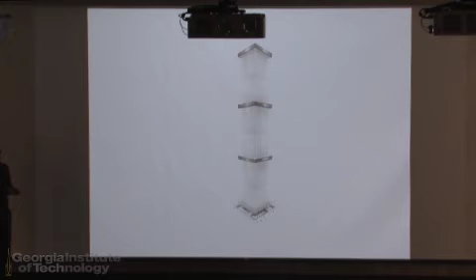We can take the prayer floors and extend cables that go from the prayer floor down to the mechanical floors, and that gives us an armature on which we can take elements. These elements are supple, but they are still discrete scales, and they have Teflon battens. The reason they have Teflon battens is because if the cable is this wide at the bottom, and it goes up like this at the top, the thing has to be able to contract as it goes, which means the building itself has these beautiful fluted shapes.

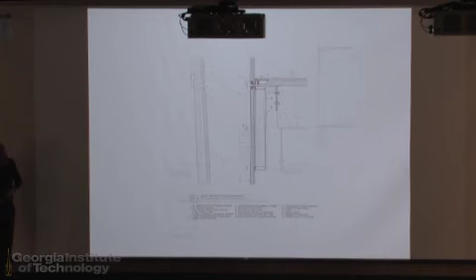And then they kind of climb up and create almost like fish scales when the thing retracts. These you can't see, so I won't talk about Mark's beautiful drawings. There you see the building, it's hiding its naked body on the inside. As I said, it's a horrible metaphor.

The whole reason we thought to do this becomes evident in this image. Because it's a financial institution, they're trading 24 hours a day. Otherwise, you would never do this. But if you do it, the problem is at night when you're trading, if you create an exterior blind, that blind will become opaque. And you can't have people trading at 4 o'clock in the morning in which all they see is their own reflection out the window.

So the thing has to go from this during the day, and then at night it has to be able to disappear so they can trade on a 24-hour basis. And they can reach this kind of ideal of having an all-glass building that's still sustainable in an incredibly inhospitable climate. So here's the result.

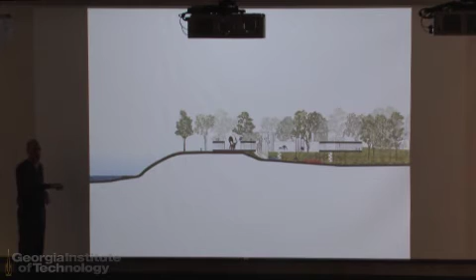So there you see the kind of X-ray of the building, and here's the actual underlying strategy - that's his house, and since we don't know what the kids are going to be like in the future, this idea of a palette again: let's give them 4 distinct kinds of living. Either they live with daddy for the rest of their lives, and hopefully they'll gravitate towards one house or another, or they're not going to live with daddy for the rest of their lives, at which point - by the way he says, my money, they're going to do what I want, we'll see - they can almost do like a timeshare.

At Christmas, one family lives here, at summer break another family can live here, and so they can kind of share the different living experiences. And so there you see the result.

We've kind of become obsessed with reflective glass. The building is wrapped in reflective glass. Why? Because he said he wanted it to look like it was always there. It's like the Spanish style thing - we don't really do that kind of thing. So we said, let's make it look like it has never been there.

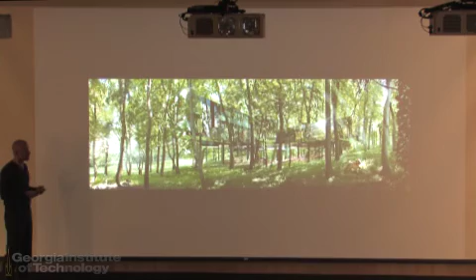So we've wrapped it in mirror glass so it's invisible, but on the interior courtyard, it's transparent so the family always sees each other. Literally, to our surprise, they have now said they want the dining rooms - they don't want any of the houses to be able to be closed off. They want the dining rooms all in this central area, so even if they're not literally eating together, they can all sit as an entire family with all individual families and see each other during dinner.

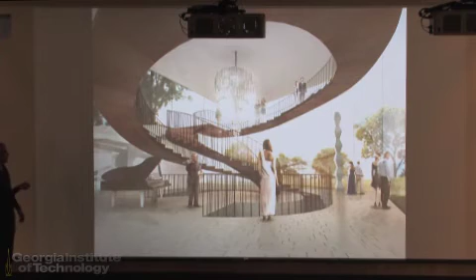And there's the grand stair. The grand stair simply takes you up to the rooftop. It's kind of like the dangly bits in the Wyly Theater.

And this is the current status of the project. Was a beautiful drawing, but you can at least see how the typologies have developed over time. And that's the actual drawing.

Okay, last project - this one is funny again, and I'll try to explain it really quickly. You guys know the whole ant bully thing that's going on. This is the Nasher Sculpture Garden in Dallas. The Nasher Sculpture Garden was the gift of Ray Nasher, a very important man in Dallas. He created this sculpture pavilion and park.

Renzo Piano designed it. According to Ray Nasher, before he died on his deathbed, he said the single most important piece of sculpture in the building is actually this egg crate shaped roof structure - a milled aluminum structure that allows only pure northern light to come in. So basically it's the cone that is the result of the sun path. It was designed between Renzo Piano and Arup. It lets incredibly beautiful light into the space.

The only problem is that directly due north of the Nasher Sculpture Garden was a piece of property on which this was developed. So it no longer only sees beautiful northern, non-direct light. It sees light that is getting magnified directly into the oculi. And because the architects of that building chose to make it a lozenge shape, it does this at every moment of the day, of the year.

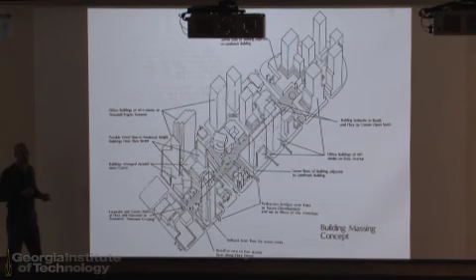So I would actually say it is the ant bully, but probably the other way around, because the people financing that tower are actually the Dallas Police and Fire Pension Fund. These are people who have given their lives, metaphorically if not literally, for the city of Dallas, who no longer have a pension because this development is sitting fallow - because no one wants to be in it, because it's shining light into their oculi.

Now, huge fight, as you can imagine. The city of Dallas is getting tired of it. It's getting a lot of bad press - it's been in the New York Times, it's been in the Wall Street Journal. And so one of the people we had worked with on the Wyly Theater, which is right there, came and said, we need you to scare the parties into playing nicely.

So, can you conceive of a third option? The first option is to cover this, and Mark and I did our own back-of-the-napkin analysis and confirmed - yeah, they can't really afford to cover it. A, it's not really clear they could put a brise-soleil on it structurally, and B, if they did, they would lose so much value. All these people have pre-sales with grand views out over Dallas, and now you're going to cover it. The amount that it would drop - even if units lost 20% of their value - would be like $140 million loss on the building, which means the building would no longer be economically viable. So we actually looked and said, you probably can't really do anything to this.

Meanwhile, the sculpture garden has been saying, this is a Dallas treasure and you're not allowed to touch it. So they actually got to the point of mediation with a mediator who used to be the lieutenant governor of the state of Texas, to get these two parties to talk. And they weren't talking. At some point they got so fed up, they asked us to come in and say, can you think of a third option? Because the first two options, which are the ones that make sense, don't seem to be having any traction. So can you scare them?

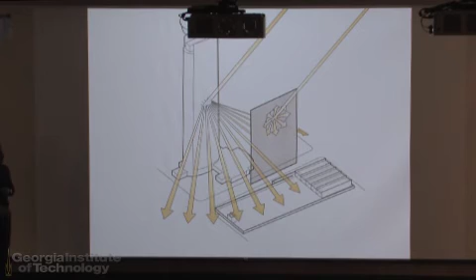Now, this is analysis that Front did. What's interesting is because the building is fan-shaped, as the light hits each panel and moves away, the reflections are not uniform. So here you're actually seeing each of the panels vertically, or lines vertically, with the space between them as they move out in space.

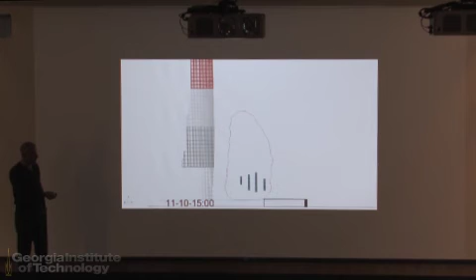And this is at 3 o'clock on every day of the year. You can see that it starts to circumscribe a certain shape. And then we also looked at it on the summer solstice, and lo and behold, it made almost exactly the same shape. So now the issue is, how do you get that shape up in the air?

And the answer is, do the London Eye. Because the city owns the piece of property right here, it's a parking lot, they can actually create a massive bicycle wheel structure with tensile cables, so it's lightweight. Onto those cables, we will put enormous sunshades that retract and deploy and retract, hanging over the piece of air rights that the city owns.

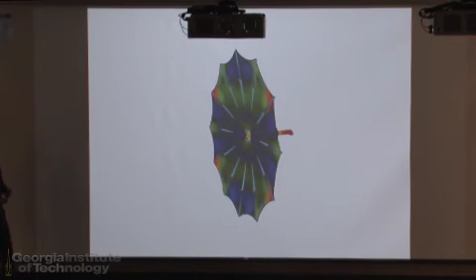This is effectively a parasol. It happens to be opening the other way. We needed to design it like this because we had to make sure it opened like that, but we wanted the machinery or the struts on the other side. So it was a more difficult engineering process, and we had to make sure we understood it in tension and compression.

And that was the result. Of course, the reason we had to make sure they deployed and retracted is that if you just made a huge sheet, you would still effectively be making the same problem, and all the units that had their views blocked would become worthless. So it had to literally deploy and retract.

And so we presented it, and it was like crickets. No one said anything. I presented it, and I left. Again, was told to go away. And after an hour, I was back in the room, and they said, 'Great, let's build it.'

That's the last thing I'm going to say. We are still a year in, and the city of Dallas is trying to raise $40 million to do it. I don't know if it's a good idea or not. I can just say that is the result.

In conclusion, the point I was trying to make, both for the built projects and the unbuilt projects, is this idea that if you understand the constraints, and if you are willing to investigate your agenda with critical naivete — suspend any solution, don't want anything, don't have a solution in mind — and simply study it till you find the thing that actually fits the constraints without it getting bastardized, the result is almost always, in our experience, inevitably something so unusual, so performative, that it somehow manages to stay capital A architecture. Thank you.